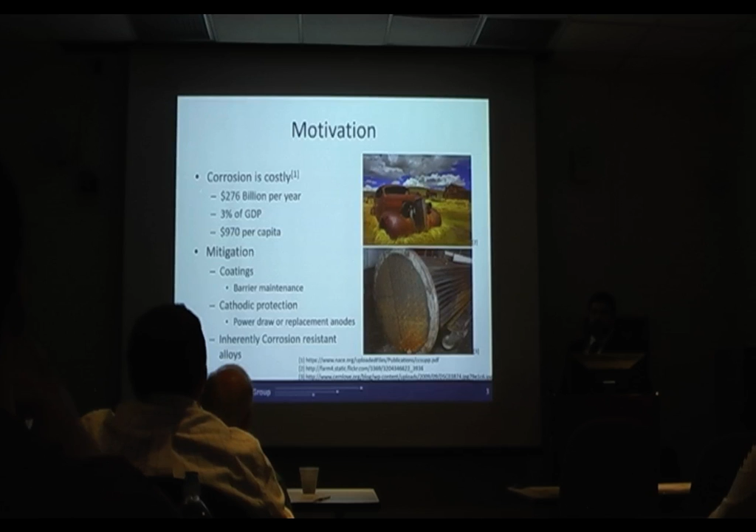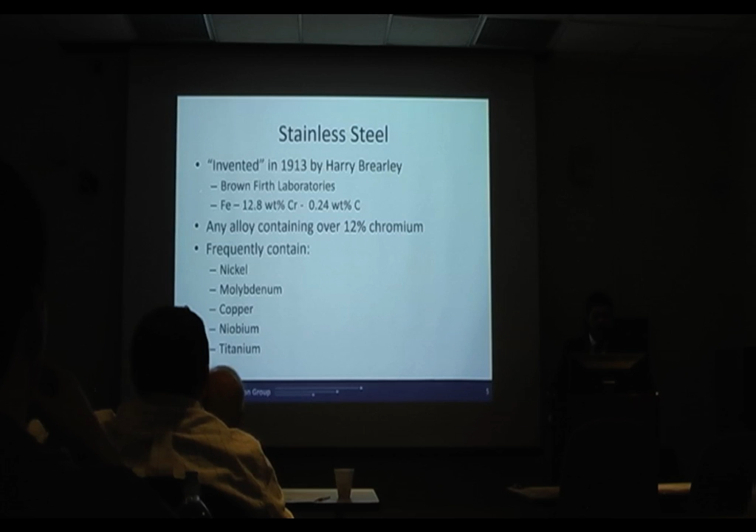Slide 5, Chad. So the question is, how can these alloys be modified to actually prevent corrosion? This was first done in about 1913 by Harry Brearley at Brown Firth Labs. He noticed that his samples, to which he had added chrome when making knife steel, had significantly resisted etching. The composition this happened with was 12.8% chromium and 0.24 weight percent carbon. But what they found afterwards is that any alloy containing over about 12% chromium resists corrosion quite well, and also frequently added are nickel, molybdenum, copper, niobium, and titanium.

So what actually happens is the chromium is added to form a passive layer. When it encounters oxygen in an environment, it forms a very thin layer of chromium oxide. This is impermeable to oxygen, unlike the iron oxides that form, so it prevents further attack by oxygen. Nickel is added to stabilize the FCC structure instead of the normal BCC structure at room temperature, and this increases the ductility, toughness, and workability.

The sample composition, or the composition range for 316, is shown below, and the big thing to note here is it's 16 to 18% chromium, 2 to 3% molybdenum, which is different than 304 - that doesn't have any molybdenum in it - and nickel is 10 to 14%. Note that the 14% is the upper limit of this range, which will be important later.

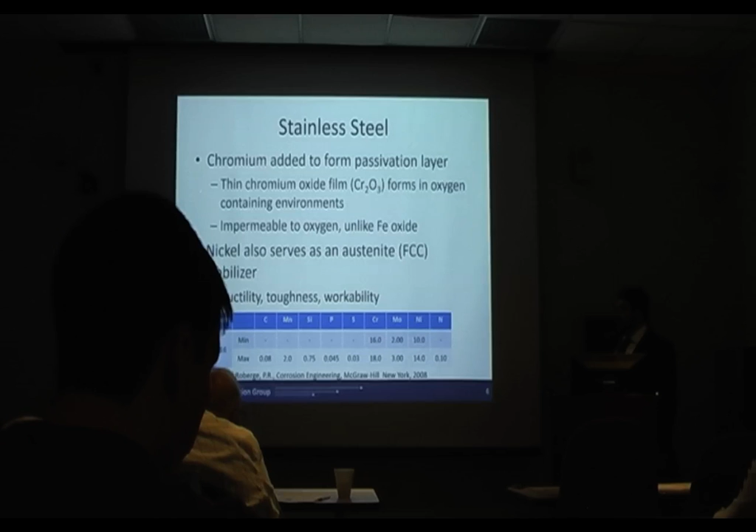So the problem with this stainless steel is that when it's heated into the 400 to 750 Celsius range, you get precipitation of M23C6 carbides. First you get interstitial segregation, primarily carbon, to the grain boundaries. The chromium follows it, and you end up with these carbides precipitating there, which is shown in an energy-filtered TEM image on the right. In this particular image, since it's energy filtered, the brighter it is, the more chromium it has. So, Chad, this is slide 7.

So here in the center, you have the M23C6 carbides, where M is either iron or chromium, but primarily chromium, as you can see here. And then you have this kind of neutral gray for your matrix, and you can see it's darker immediately around those carbides, which is because the chromium there is depleted. It's been sucked into the carbide.

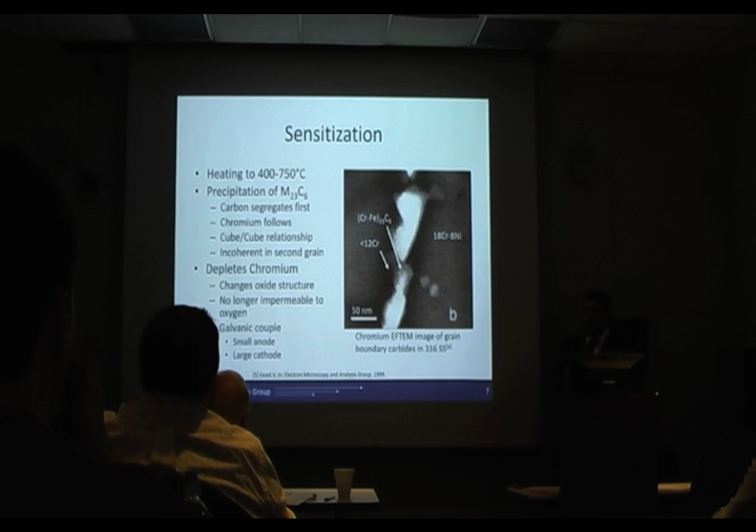The problem with this is that it can drop chromium below 12%, so you change the oxide structure back to the normal iron oxide structure, and it's no longer impermeable to oxygen. But the real problem is that you now have a galvanic couple between your very large grain area with the passive layer, which is a large cathode, and a very small anode area around the grain boundaries, which is vulnerable, so you get very aggressive attack there.

Slide 8. You can get a couple different kinds of attack. The most commonly studied is intergranular corrosion, shown on the right here. This is chemical attack of the grain boundaries, and it's usually assessed with the ferric sulfate sulfuric acid test. This is a very set chemistry of the set amount of ferric sulfate, sulfuric acid, and water, and it's boiled inside a flask with a condenser. The point of this is that it's very reproducible across different laboratories.

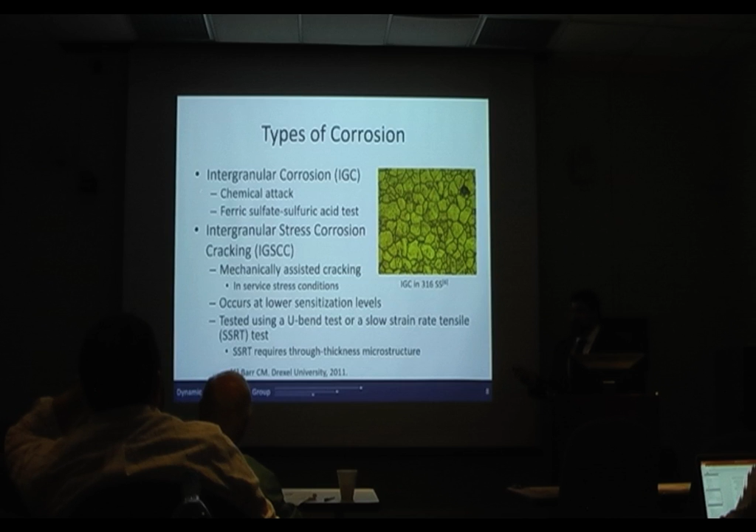However, you also have a second kind of attack called intergranular stress corrosion cracking. This, in addition to the chemical component, has a mechanical component as well, and it's experienced more in service conditions. The big thing with this is you can actually get it at lower sensitization levels than you can get intergranular corrosion. This is typically studied with a U-bend test or a slow strain rate tensile test. The catch with this, especially with the slow strain rate tensile, is you need a through-thickness microstructure to study it because it's machined from the bulk alloy.

Slide 9. So the question is, we see the grain boundaries are being attacked, and we want to know what's different about the different types of grain boundaries. First we have to know how to describe them. There are 5 macroscopic parameters and 3 microscopic parameters.

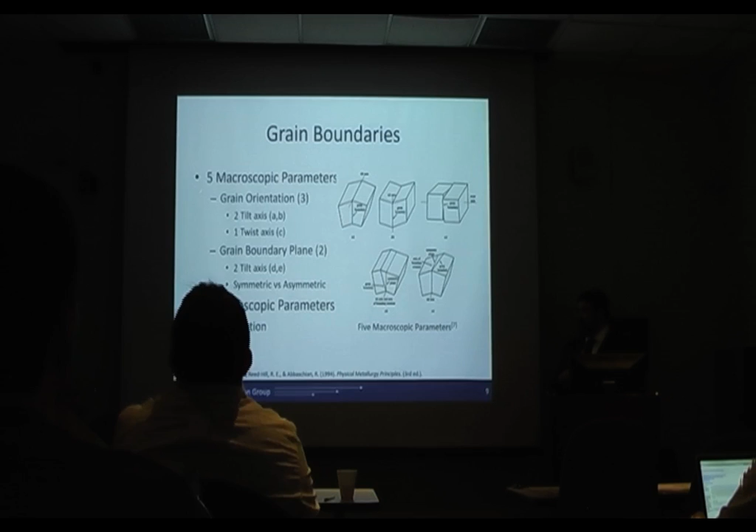The macroscopic parameters are again divided up. You have your grain orientation, so each grain is its own crystal, and those crystals can be tilted in 2 axes relative to each other, and they can also have a twist. Then the grain boundary plane, where those 2 crystals actually meet up, can also be tilted in 2 different axes. The microscopic parameters are small translations in 3 dimensions that are a fraction of the unit cell.

So now that we know how to describe them, the grain boundaries can be classified. First is the low angle grain boundary. This is less than approximately a 15 degree grain boundary, or angle between the 2 grains. This is typically described as a network of dislocations, shown in the top image on the right. We have on the left 1 grain, on the right another one, and right in between you can see these dislocations that are required to make the 2 crystals match. The spacing of the dislocations is described by this relationship here, which includes the spacing, the Burgers vector of the dislocations, and the actual angle of the 2 crystals.

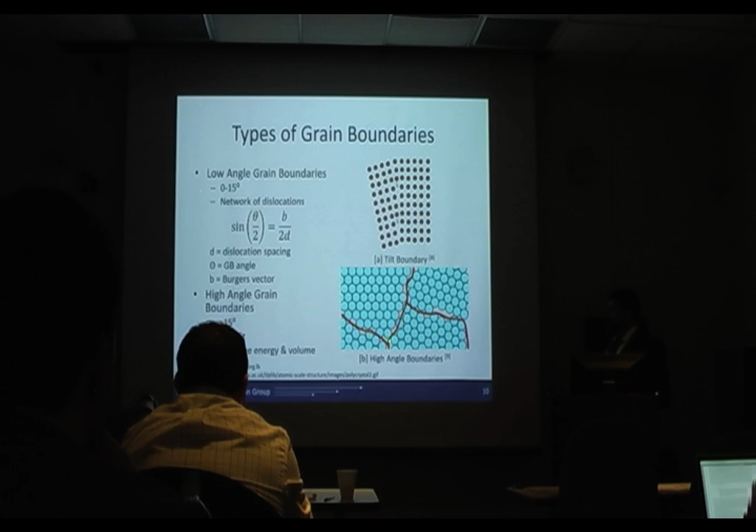If you have a larger than 15 degree misorientation, you have what's termed a high angle grain boundary, and there you typically have a much poorer fit, shown in the bottom image. It doesn't line up as nicely as it does in the top. This causes much more free volume and free energy, which can be seen as the white space.

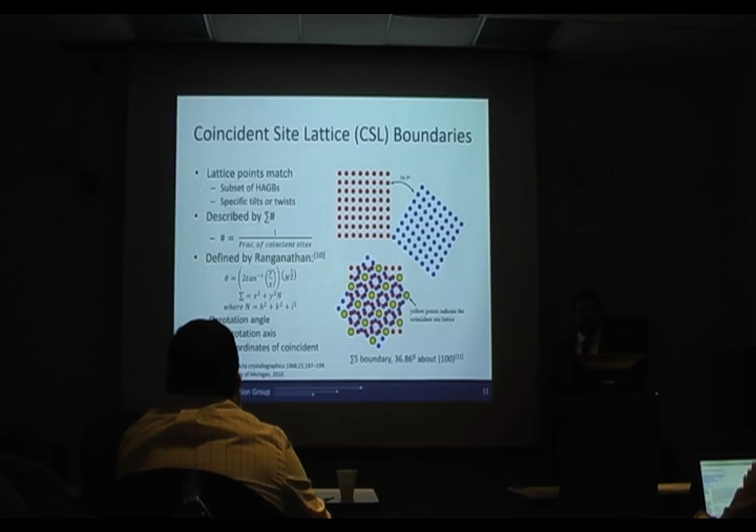This was described by Ranganathan. He came up with equations to calculate the fraction of coincident sites, which is typically denoted by its sigma number, the inverse of the fraction of coincident sites. So if 1/3 of the sites are shared, then it would be a sigma 3 grain boundary.

Moving on to grain boundary engineering, Watanabe proposed in 1984 that these grain boundaries could be used to improve the properties of polycrystals by processing them so that you have more of them - typically more of the low CSL, sigma less than or equal to 29. The idea was this way you can adjust the properties, including the strength, ductility, and corrosion resistance. And the way you get more of these CSLs is through thermomechanical processing.

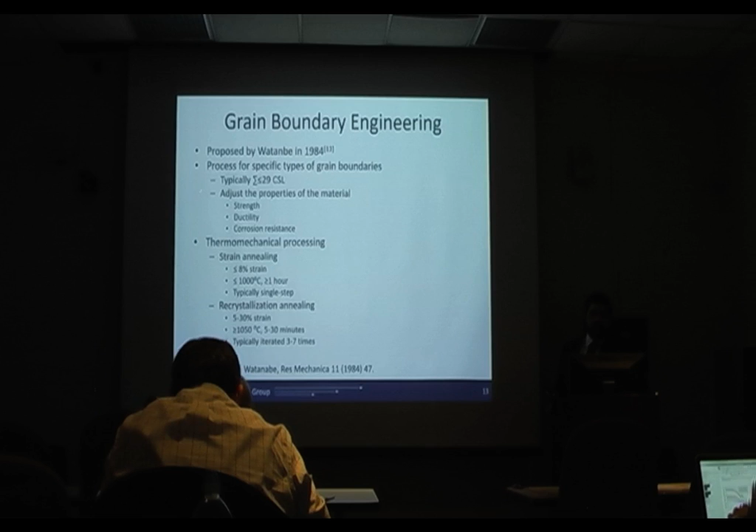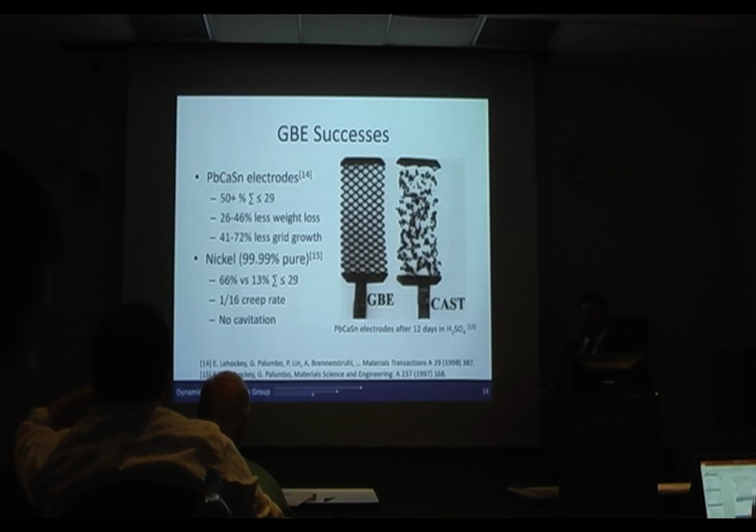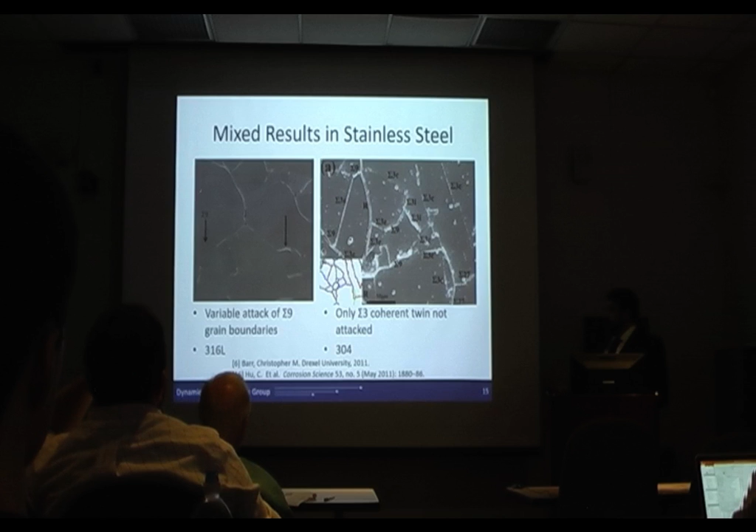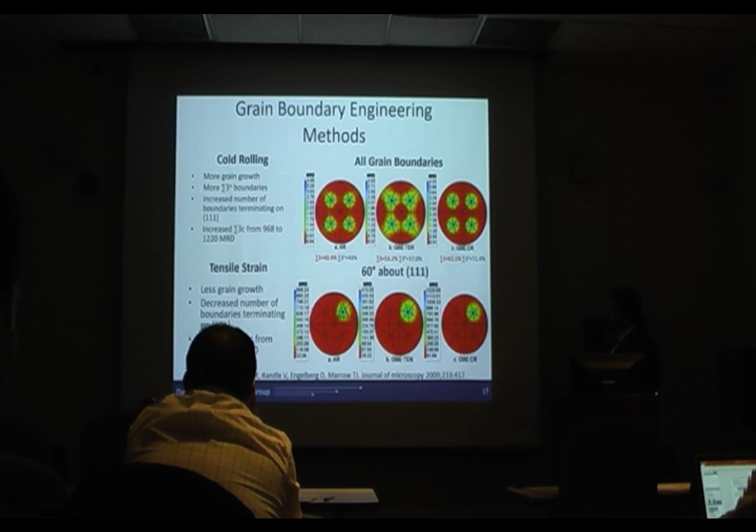That brings us to some of our questions. How does the grain boundary plane play a role in the corrosion resistance in stainless steel? It looks like it does, but we're not quite sure how. And how do corrosion-resistant grain boundaries affect the bulk corrosion resistance of the material?

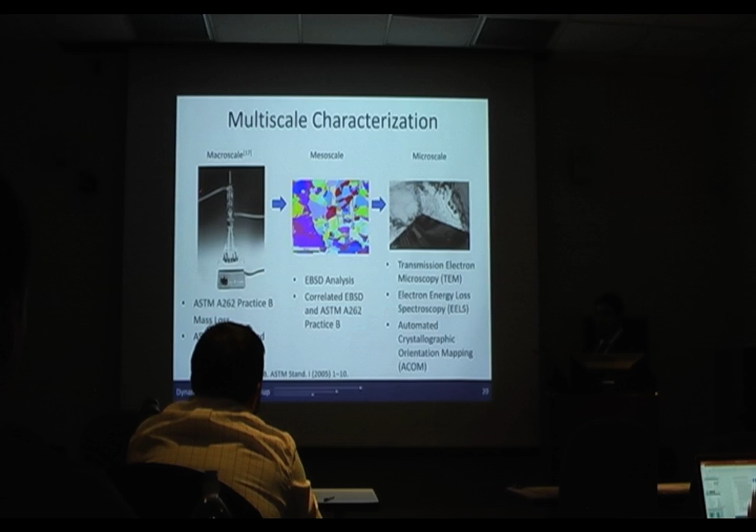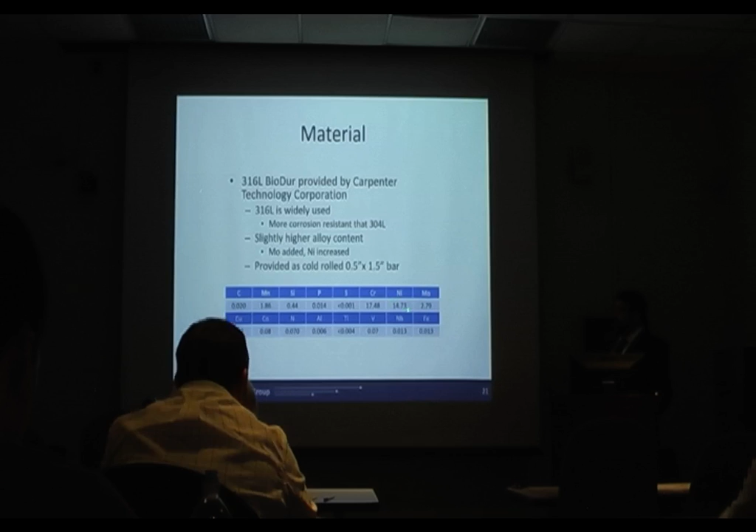The material that we used was primarily 316L BioDur provided by Carpenter Technology Corporation. 316L is widely used, and it's more corrosion resistant than 304. It has a slightly higher alloy content. Compared to the 304, moly's been added, but in this heat specifically, the nickel's actually even a bit above spec. It's 14.73%, and typically it's not above 14, and in a lot of heats it's down in the 10 to 11 range.

So moving on to my results. First question was calculating the grain boundary plane. There are established methods for doing this in TEM, but initially we wanted to do atom probe tomography and correlate that with the grain boundary plane. However, the problem with that is the specimens don't load well into a standard double tilt holder. We do have a dedicated holder for them for TEM, however, it only has a single rotation axis, which makes typical analysis somewhat more difficult.

However, we do have our ACOM system. So what we can do is tilt the grain boundary so that it's parallel to the beam. That angle is then beta. In this case, it's 0 because it's parallel, but if you know your angle, or if you know your thickness and can measure the width, you can calculate that. Then you also measure this alpha between the grain boundary and the x-axis. You vectorize those in vector A and B, and the cross product of those is your grain boundary normal. If you multiply the orientation of either grain by that normal, you end up with the local crystallographic indices of those grain boundary planes.

We tried this on a coherent sigma 3, and we're within 3 degrees, which is getting close to how closely we could align that grain boundary. I have the reference here for Dr. Randle's paper. She had discussed how to do this in SEM techniques, but we realized we could apply this to TEM, and then Asher Leff helped me write the MATLAB code for this.

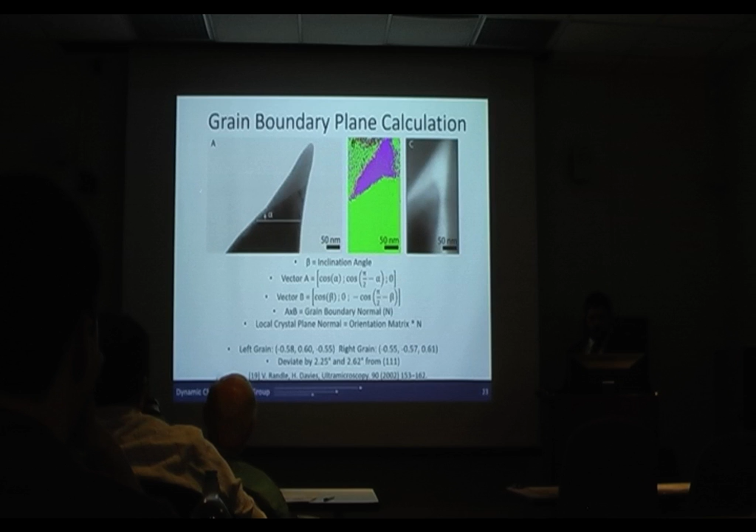So moving on, we wanted to see how we could apply this to other materials as well, especially atom probe specimens. This is a 5456 specimen, and on the left we can see the grain boundary has been decorated by these precipitates. By getting an ACOM scan, we can then calculate the local grain boundary planes for each of the grain boundary segments between those precipitates.

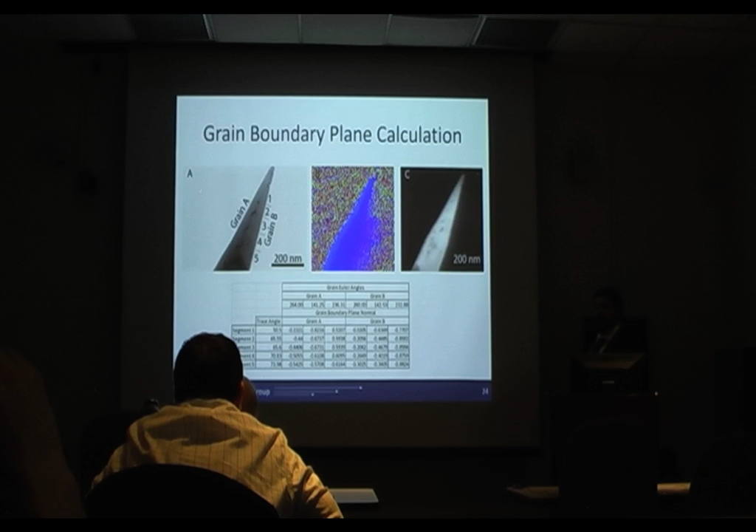So moving on, we're on slide 25 now. Next question was propagating our GBE microstructure through thickness. Most of the work in GBE has looked at the rolled surface because that's the most affected region. However, for the slow strain rate tensile specimens, we wanted to be able to machine samples out, and this also has industrial applications because you can then machine bolts and things like that.

Dr. Barr's procedure, which he spent quite a bit of time refining, settled on a 5% rolling reduction and then a 1 hour hold at 1000 Celsius. However, he did not look at the center line. Michiuchi used a very similar procedure, except that he held for 72 hours, and he reported that doing so allowed propagation through the thickness. Again, we wanted that for the best corrosion performance.

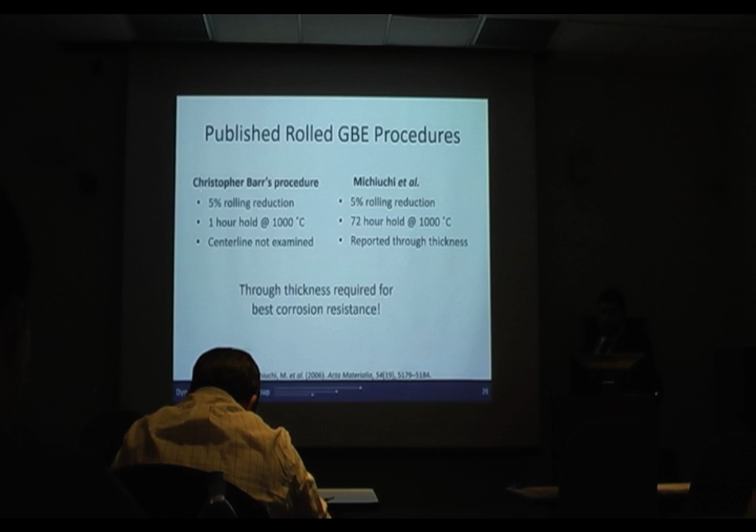However, when we attempted his procedure, we found that it was significantly more variable than we would have liked. The grain boundary maps are shown at the top, but the big thing is our sigma 3 to the n, which when I say that here, it's the sigma 3, sigma 9, and sigma 27s added together. The total fraction in the left map was 72%, which is pretty good, but it was only 50% in the right map, which is much more indicative of the length fraction expected for an annealed microstructure.

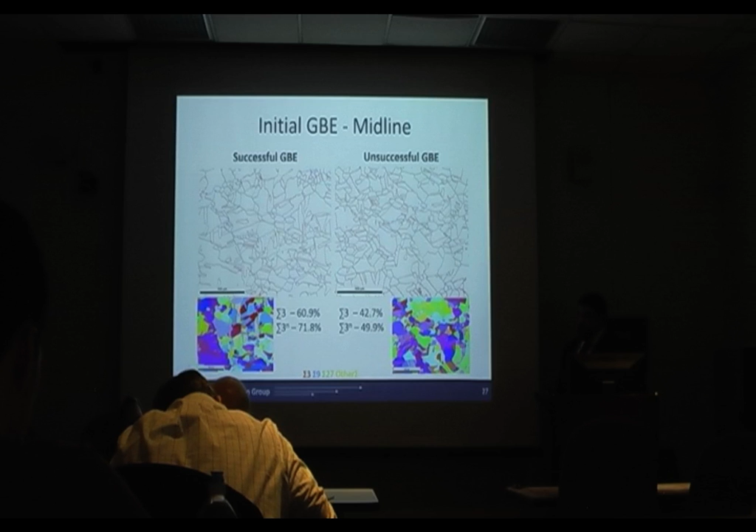So that is referred to here as the SR condition. We went back and tried several iterated procedures. Again, we're still using 5%, but we tried 3 iterations at 1000 and 1020 Celsius.

We tried different times as well. What we found was our sigma 3 to the n content rapidly reached a relatively high level and was highly consistent, using 2 hours at 1020 C, repeated 3 times with 5% strain.

Moving on, the two colours are the two different section surfaces. On the previous slide, the blue and red are surface and center. Actually, the red is 1000 Celsius, and the blue is 1020 Celsius. They're also using slightly different times. They are all measured at the center.

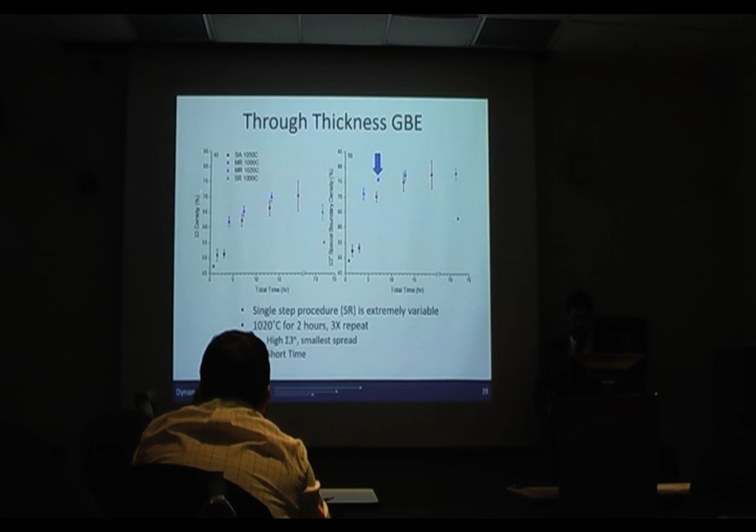We're moving on to our microstructural characterization. We have our annealed microstructure, which is our control - that's what was delivered to us and then briefly annealed to remove the cold rolling. We have a rolled GBE, which I just talked about, and then a tensile GBE procedure published by Dr. Jones and Dr. Randle. The most reported metric for GBE at this point is the length fraction.

However, there are several different ways to classify that. The most traditional is the Brandon criterion, represented here by the B. There's also the Palumbo-Aust criterion, which is a little bit tighter, and that's been shown to track a little bit better with corrosion performance. Then there's also just a flat 2-degree cutoff, which is actually much tighter for sigma 3s and a little bit looser for the higher order sigma grain boundaries.

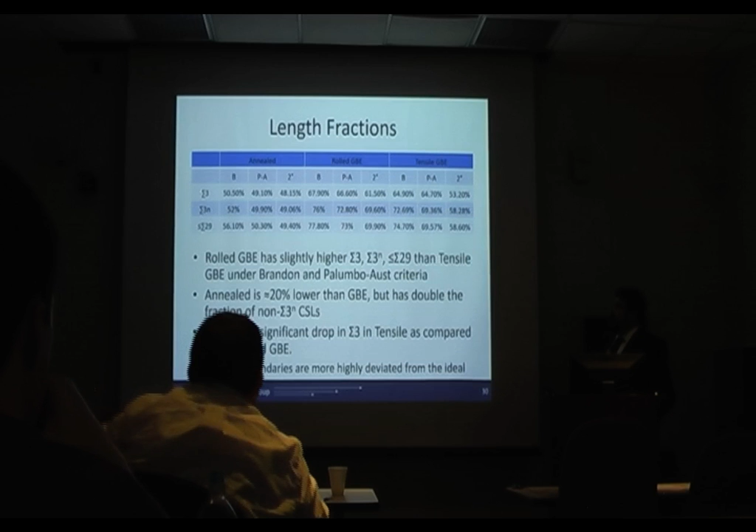What we found was that the rolled GBE has slightly higher content than the tensile GBE, and the annealed is about 20% lower in length fraction compared to the GBE. But the really big difference that surprised me was the length fraction of sigma 3s under the 2-degree criterion: 61% for the rolled GBE, down to 53% for the tensile GBE. What this denotes is that in the tensile GBE, the sigma 3s are actually more highly deviated from the ideal. They're still within the criterion for the Brandon criterion, but a significant percentage of them are beyond 2 degrees.

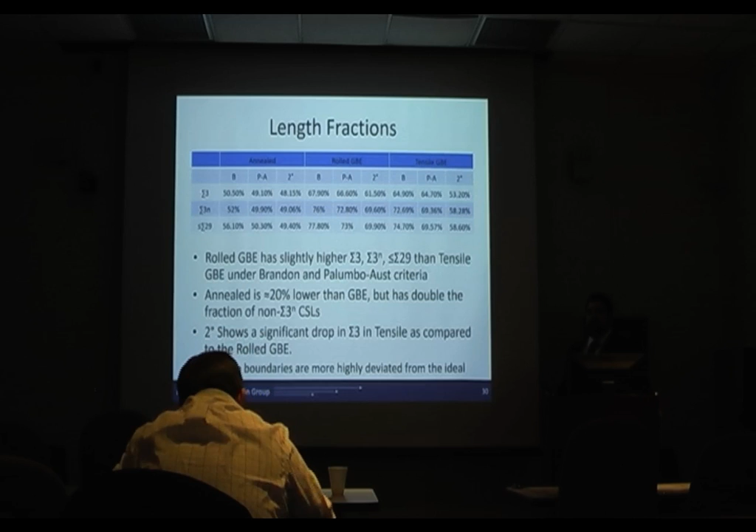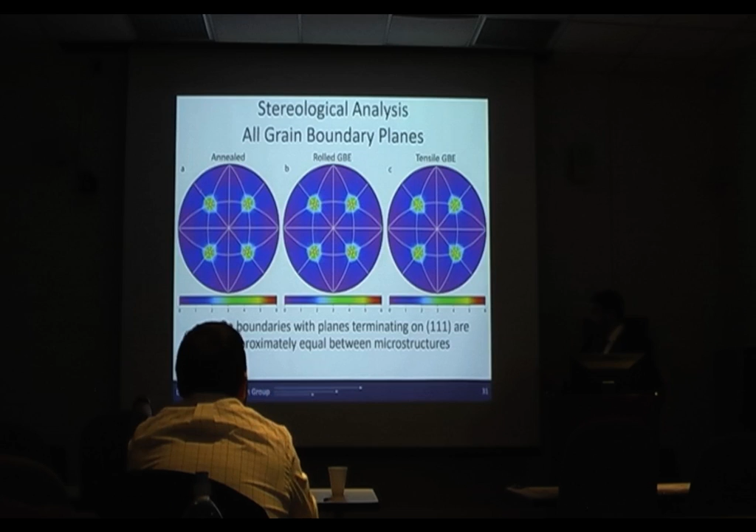Moving on to the stereological analysis, we were somewhat surprised to find that we actually had the same number of grains terminating on 111 in all 3 microstructures. This is not what was shown by Dr. Jones. When we look at the 6 degrees about 111, we actually have a much higher fraction of sigma 3 segments, noted by about 2,800 MRD, compared to his reported value in the range of 1,000.

But again, they're the same across all three microstructures, which is not what he showed. There was a follow-on work by Randle where they noted something similar in only the tensile, where when they iterated it, they saw that it again returned closer to what the annealed was, but it still wasn't quite identical, and they didn't look at the rolled condition.

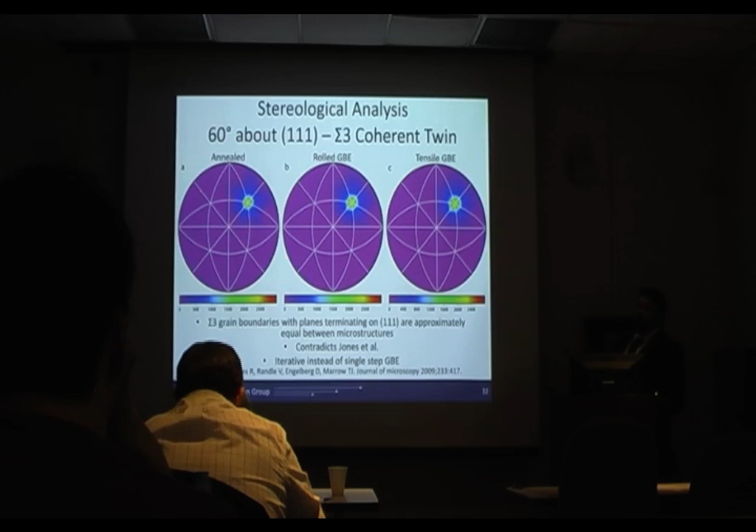When we move to the triple junction analysis, when three grain boundaries meet, you have a triple junction, and we're looking at the number of CSL grain boundaries that meet there. So a 3 CSL triple junction has 3 CSLs all meeting, and generally those are considered to be immune to cracking.

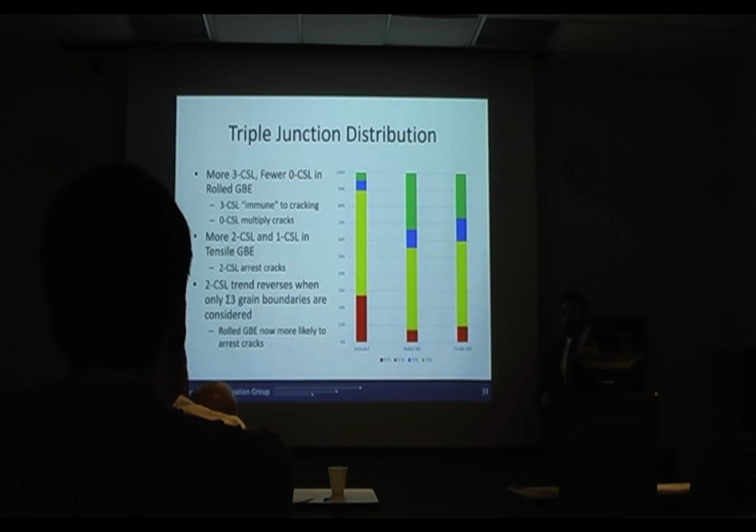What we found was that the rolled GBE had more of these 3 CSLs and also had fewer 0 CSLs, which is important because with 0 CSLs, if you have a high angle grain boundary with a crack propagating along it that hits a triple point with 2 other high angle grain boundaries, it actually multiplies, so you end up with 2 other cracks propagating, or it can do so.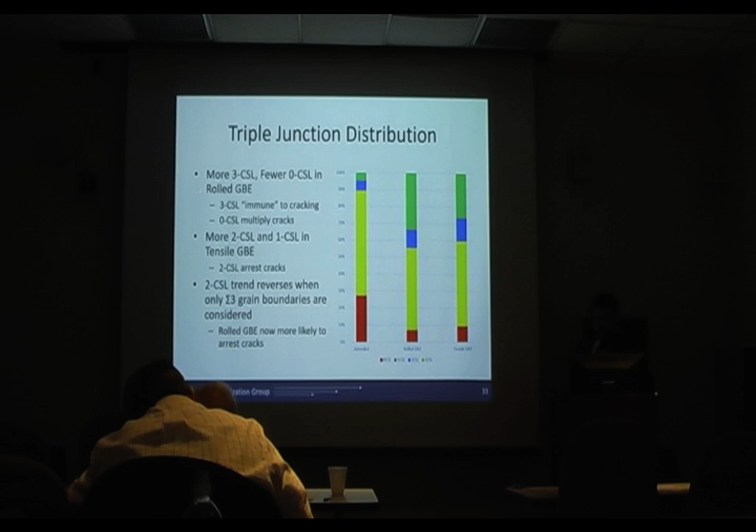The 2 CSL, on the other hand, was higher in the tensile GB. This is important because the 2 CSL can actually theoretically arrest cracks - so if you have one traveling along and it runs into a triple junction with 2 CSLs, it can stop. However, this trend does reverse if we only consider the sigma 3s to be special, and then the rolled is more likely to arrest cracks as well.

Next metric is grain size, which is a deceptively complex question. On the left, we're considering all grain boundaries, and on the right, we're excluding sigma 3 to the n. The idea there is to get at what's called a twin-related domain, where you can get inside it from any point to any other point, only

going across sigma 3 grain boundaries. What we found was that the GBEs under the all grain boundary condition are about double the diameter and 5 times the area, and under the excluding sigma 3 to the n, it's about triple the diameter and 15 times the area. In both of those, it's about 1.5 larger on the ASTM grain size scale. The rolled GB is slightly larger compared to the tensile GB in both, and the aspect ratio for the annealed is closer to 1, showing that they're closer to equiax.

Moving on to the Vickers microhardness, slide 35, Chad.

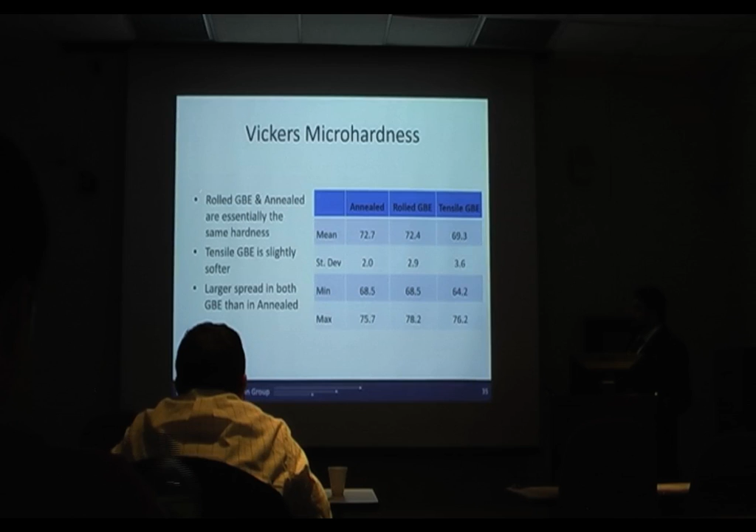The rolled GBE and the annealed are almost identical in terms of hardness, and the tensile GB is a little bit softer. This is actually pretty surprising to me given their differences in grain sizes. However, there's also a larger spread in the GBE than the annealed.

So, quick summary about this. All microstructures have similar coherence to the sigma 3 grain boundaries. Both GBE microstructures have about 20% higher length fraction of CSLs, and the rolled GBE is a little bit higher than tensile GBE, and the tensile GBE is also more highly deviated. The rolled GBE has a higher fraction of 3-CSLs and lower of 0-CSLs. Tensile GBE has more of the 2-CSLs, but less if you're only considering the sigma 3s. And then the rolled GB has a slightly larger grain size than the tensile GB.

All of that indicates that the rolled GBE should be a little bit better in corrosion than the tensile GBE, based off the published literature.

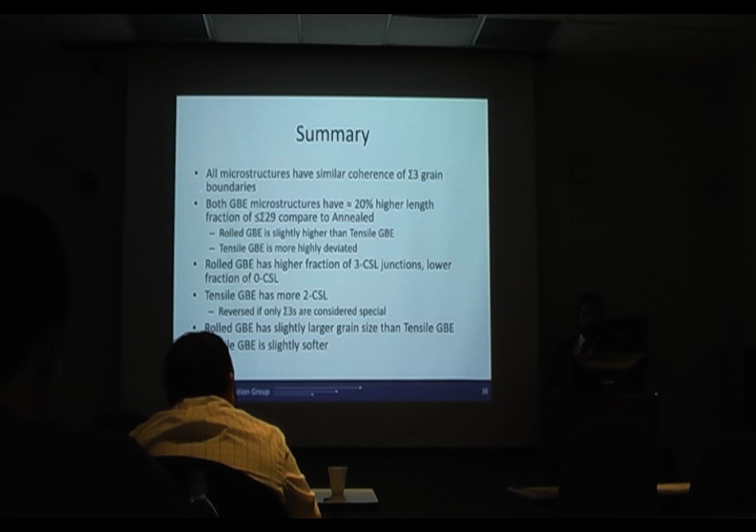What we found was we actually accidentally milled away our platinum coat at the top, but we still saw over 240 nanometers of corrosive attack, and neither grain is terribly close to a 111 crystal plane, being at least 11 degrees away. The enrichment of chromium is about 2% and about 0.5% in manganese, and then we depleted about 2% in nickel and 1% in iron at the grain boundary.

It's a little bit hard to see in these maps, especially on the projector. But those numbers were generated by integrating a large area across the grain boundaries.

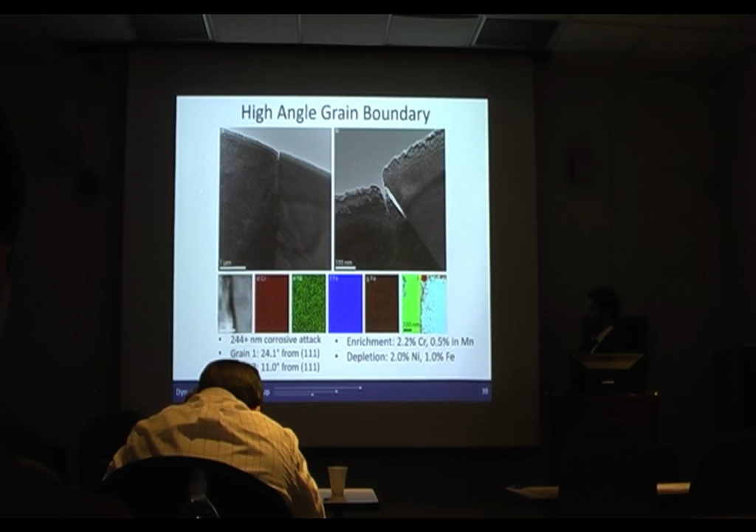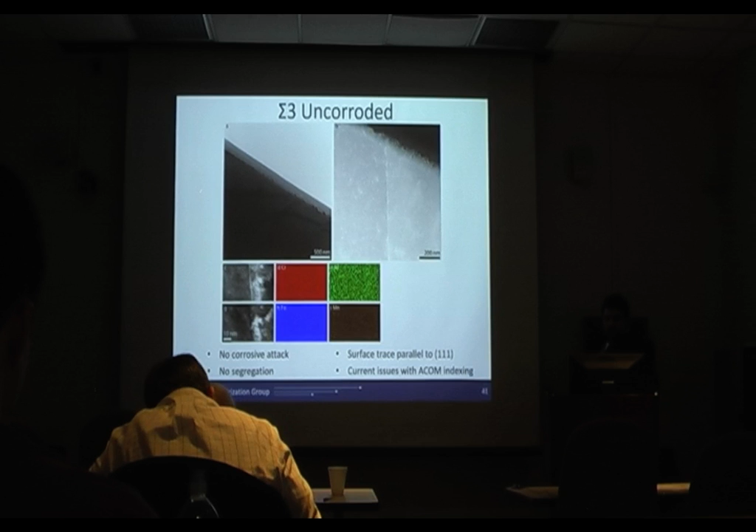So moving on, next we have the sigma 3s that I showed previously. We actually selected 3 different locations to do lift outs. The first one here is a region that didn't appear to be corroded in SEM, and in TEM we can see again that it did not corrode, and we had no segregation at this grain boundary either. The surface trace is parallel to 111. We're currently having some issues with the ACOM indexing of the scan, but based off Dr. Randle's methods, it's about 90% chance that it's a coherent sigma 3.

When we look at one of the straight sections that did corrode, we see that we have 345 nanometers of corrosive attack, and both of the local grain boundary planes are quite far away from 111. Had, again, enrichment of chromium and depletion of iron.

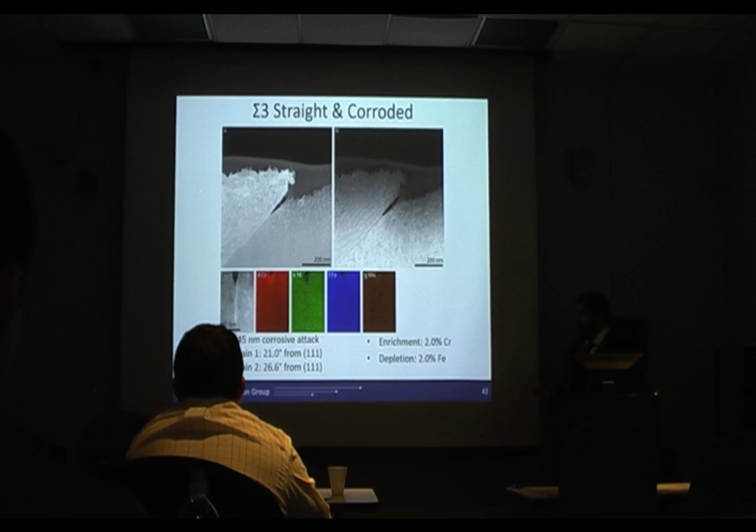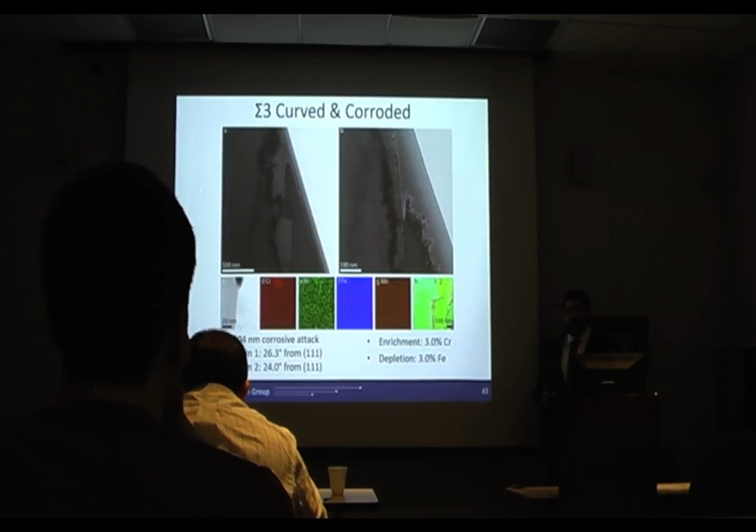And then in the curved portion, again, over 20 degrees away from a 111, and 200 nanometers of corrosive attack, which you can see here. But we also see that it's not actually curved on the nanoscale. We actually have straight segments and facets. So even though it appears curved in the SEM image, it's likely the structure of these very small facets.

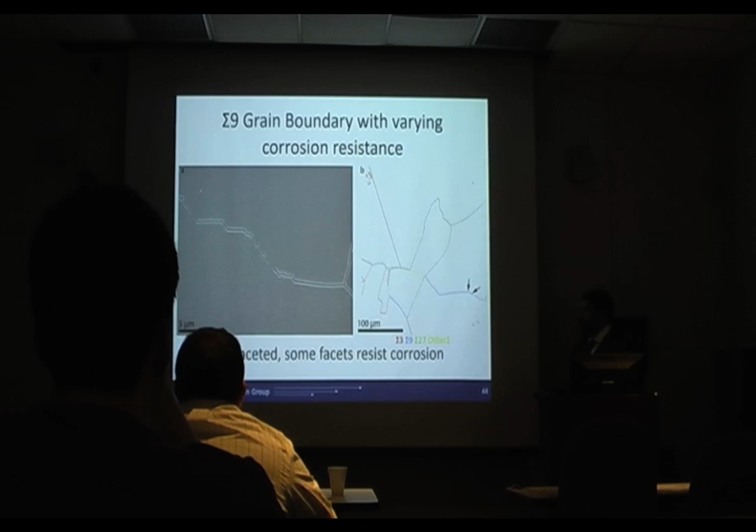Moving on, we have a pair of sigma 9 grain boundaries. On the right, it's denoted in the blue, and then on the left, we have the zoom in of the corroded region. You can see that we have these facets here that are not corroded, then all the other ones did. So for one of the corroded ones, we see we have over 400 nanometers of attack, and then both of the grains are again over 15 degrees away from a 111, and we had chromium enrichment and iron depletion.

However, the sigma 9 that did not corrode was the most interesting of these. You can see we have this kind of faceted structure here, a little difficult to see, but there's also a grain boundary trace, most likely visible between this point here and the actual surface.

What was actually happening was the sigma 9 occurs when two sigma 3s meet, so between the left grain and the right grain is a sigma 9 orientation relationship, but that boundary appears to have dissociated into this nano twin array.

We have a coherent sigma 3 that we determined terminates within around 5 degrees away from a 111, and then we have an incoherent sigma 3 where we have enrichment of about 4% chromium and depletion of 4% nickel.

This is a sigma 3 misorientation, but we don't have the grain boundary plane for that segment.

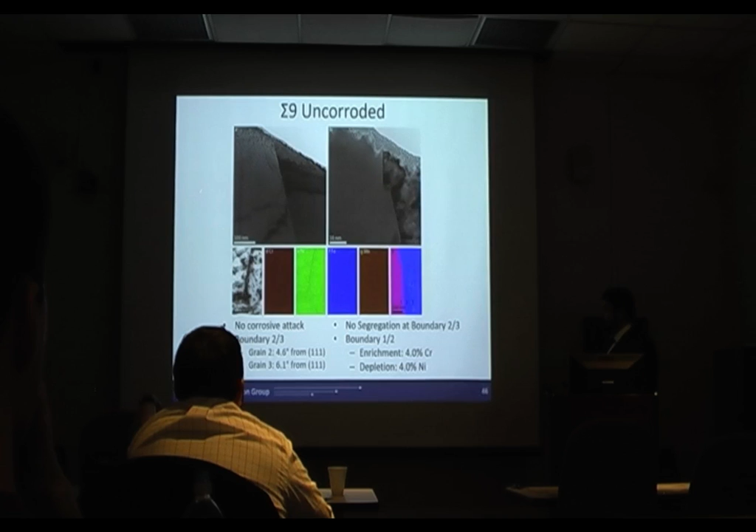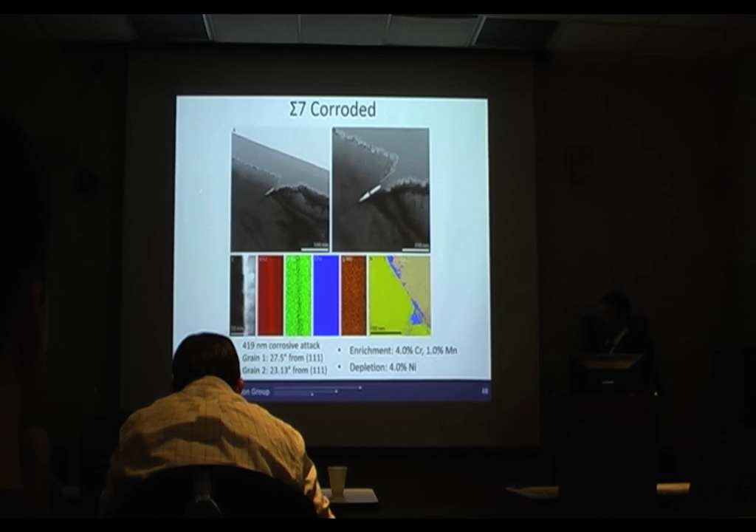When we lifted out the one that corroded, again over 400 nanometers of corrosive attack, which you can see here, both grains are over 20 degrees away from a 111, and we have enrichment of 4% chromium and 1% manganese, and depletion of nickel this time instead of iron.

When we move on to the uncorroded one, you can see it's not attacked at all at that surface relative to the general surface attack.

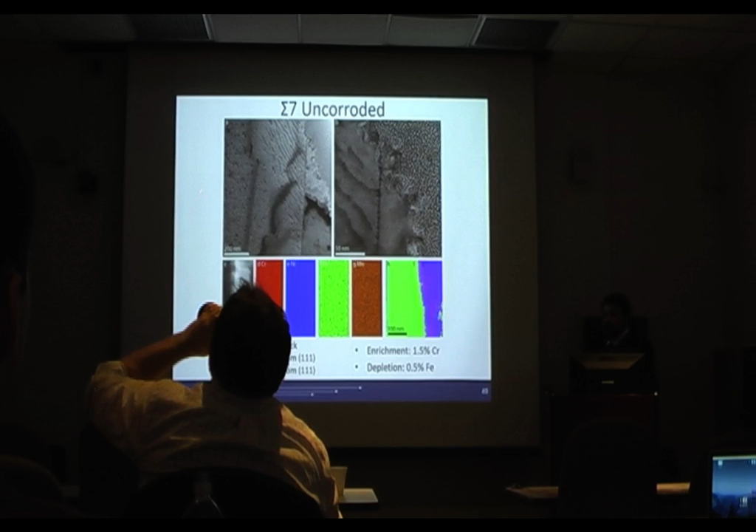We can see that while it's closer to a 111, it's not actually terminating on it—about 10 to 15 degrees away. We actually have slightly lower levels of chromium enrichment and iron depletion, though that variation can also be caused by sample thickness and scattering in this technique.

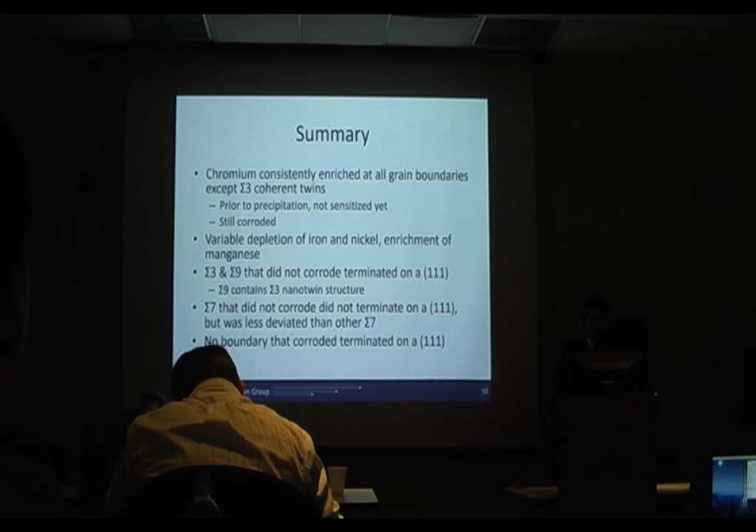So in summary for this section, chromium consistently enriched at all grain boundaries except the sigma 3 coherent twins, prior to precipitation. This indicates precipitation hasn't happened yet. We actually have an increase in the chromium level, so it's not classically sensitized yet because we don't have the depleted region, but it would be the early stages of sensitization.

However, it's still corroded, which... Can you remind me what was the heat treatment? For this, it was a 1 hour sensitized at 675 Celsius. And how was it treated? Did you quench it? It was after the grain boundary engineering, it was quenched, and then we heated it back up to 675 for an hour. So some of these samples, despite being quenched, show segregation. Yes.

We also saw some variable depletion in iron and nickel, and enrichment in manganese, but that did not appear as consistent. The sigma 3 and the sigma 9 that did not corrode both terminated on 111 grains, and the sigma 9 was actually that array of nanotwins.

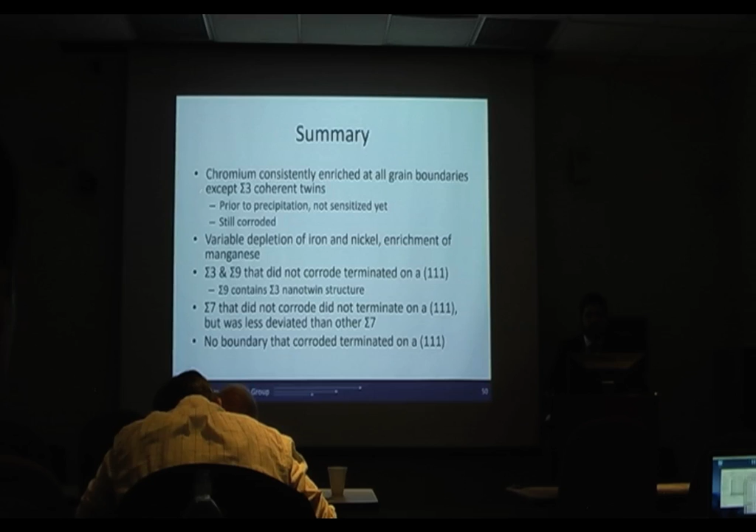The sigma 7 that did not corrode did not terminate on a 111, however it was significantly less deviated than the other sigma 7 from a 111 plane, and no boundary that corroded terminated on a 111.

So moving on, Chad, slide 51, to the bulk corrosion portion.

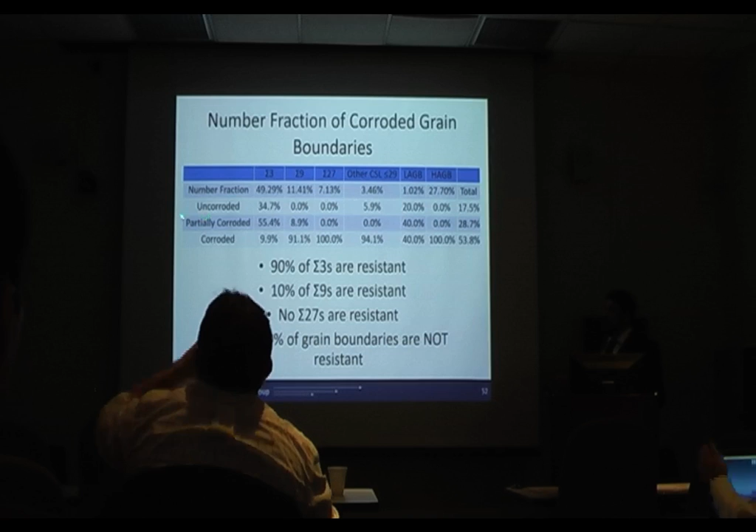The first thing we did was those images that I showed with the correlated TEM, SEM, and corrosion. I went through and counted the number of grain boundaries that were either completely uncorroded or partially corroded, meaning they had facets that were resistant, like we've been looking at in TEM, or were completely corroded.

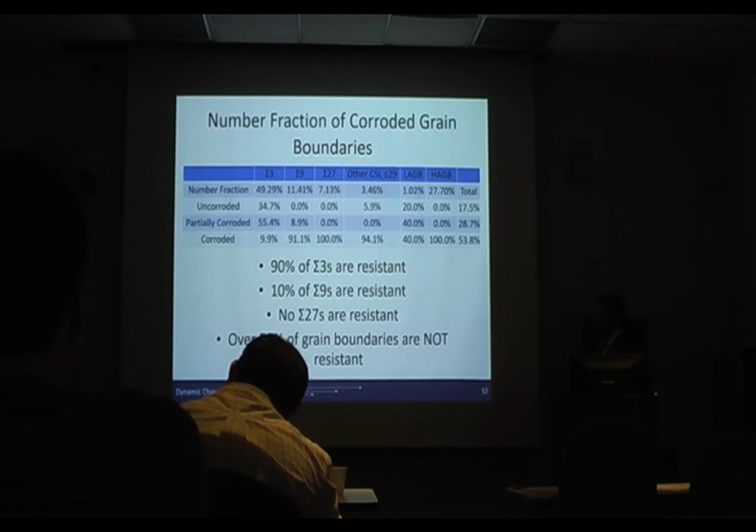What we found was that 90% of the sigma 3s were at least somewhat resistant, but less than 10% of the sigma 9s were, and no sigma 27 in this case resisted corrosion. Also, when we look at the total number fractions, over 50% of the grain boundaries do not at all resist corrosion.

When we move on, because of some distortions from the actual collection in our microscope, I wasn't able to stitch the scans together, so they're just shown side by side.

What I did then was go and color in regions. On the left are what I'm calling cracked or arrested regions—within any individual color, you can get from one point to any other point without going over a cracked grain boundary. So those regions do have cracks going into them, but they've all arrested at some point.

On the right are twin related domains. In this region, you can get from any point to any other point going across a sigma 3, 9, or 27. As you can see, they're similar, but not quite the same.

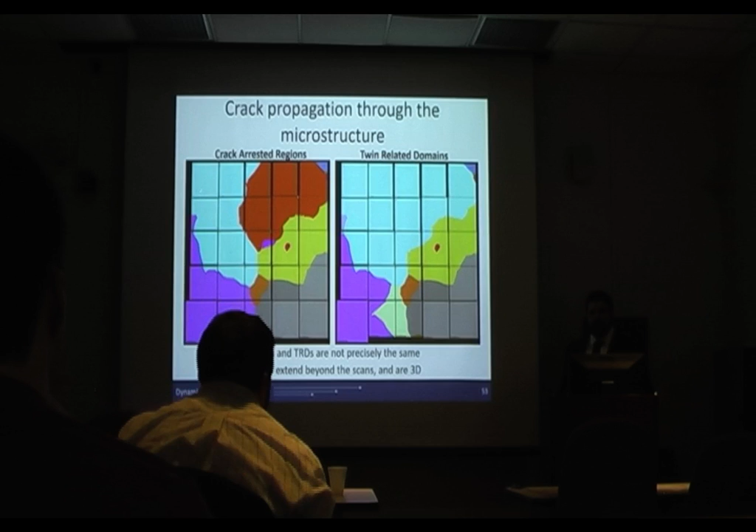On the left, the blue and orange are the same blue on the right, and on the right, the greenish and purple are all purple on the left. The catch is that both of these extend beyond our field of view, and they're also three-dimensional structures. So it's possible that the CARs and TRDs are actually the same, but my experiments were unfortunately too limited to determine that.

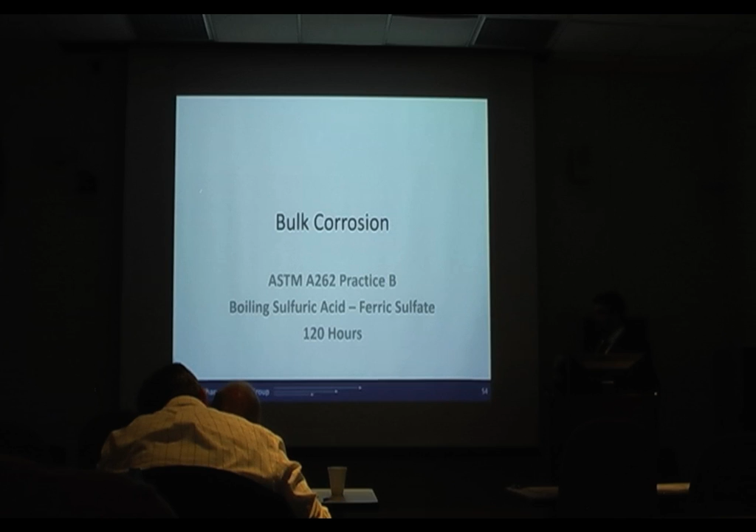Moving on to the bulk corrosion, we have the 262 practice B. The standard method involves immersion for 120 hours, massing it before and after to see how much mass it lost. When we look at our unsensitized samples—these were all quenched but not heated into the sensitization range again—we can see that we are getting attack at the grain boundaries, indicating just how aggressive this environment is.

We have our annealed, rolled, and tensile GBE again, but we've also added two conditions: the annealed and rolled plus 10% elongation. We made tensile samples from these microstructures and pulled them. The idea is, as we're sensitizing these, we want to see the role that adding strain to the microstructures plays.

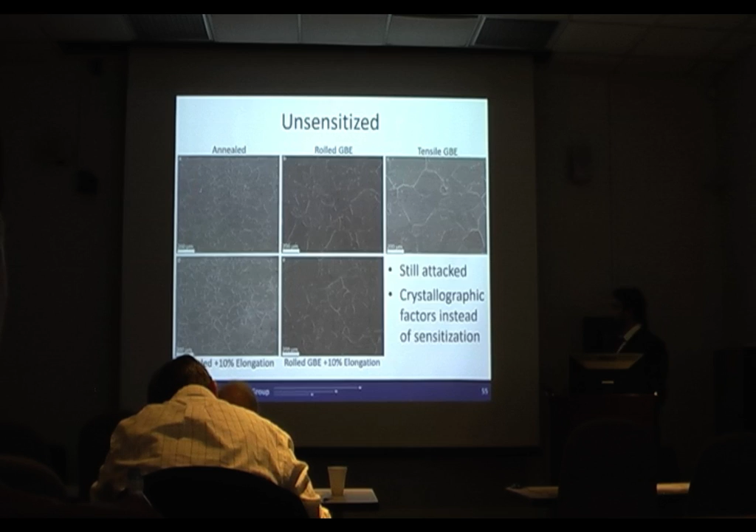I also did the 1 hour sensitized, which you'll see the data from, but honestly in SEM they appear pretty much identical to the unsensitized.

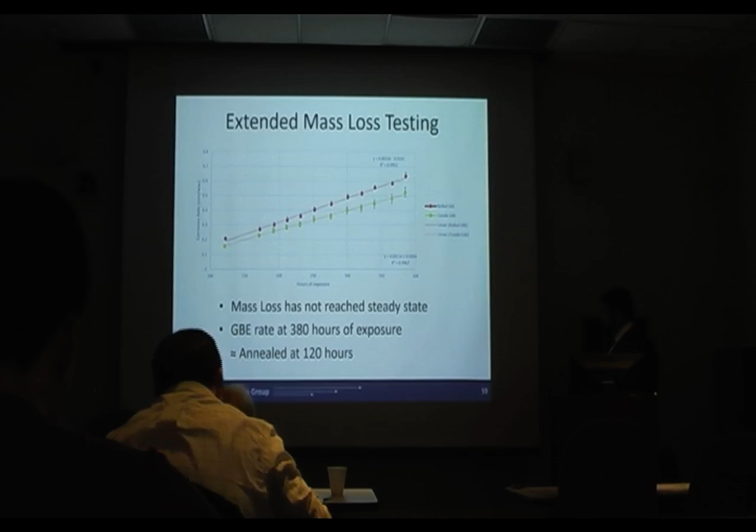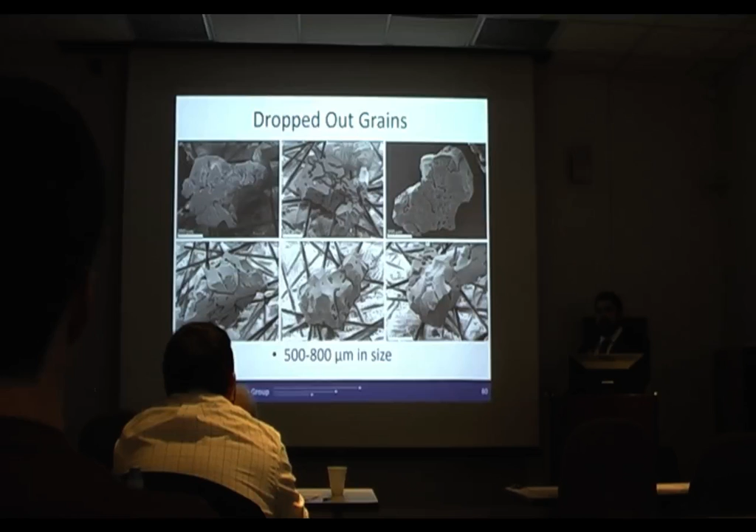This is actually somewhat confirmed because I went fishing in our test rig for the grains that dropped out, and these are all from our grain boundary engineered samples. If I back this up to the 100 hour, in the annealed, these are about 50 to 100 micron grains that dropped out. Then on slide 60, we see that these are actually 500 to 800 microns now dropping out of the GBE microstructure. You can see this is actually a flat face. Almost all the grains have a very obviously flat face. This is the polished surface of the sample, so it's still our surface layer that's dropping out.

So the question then is, how does this fit into the published work? I'm not the first person by any means to talk about the TRD model. That was Reed and Kumar in 2006, who actually investigated the corrosion with respect to TRDs in 2011. He was the one that noted that only the sigma 3s were very, very good at arresting the cracks. All the others were at best variable.

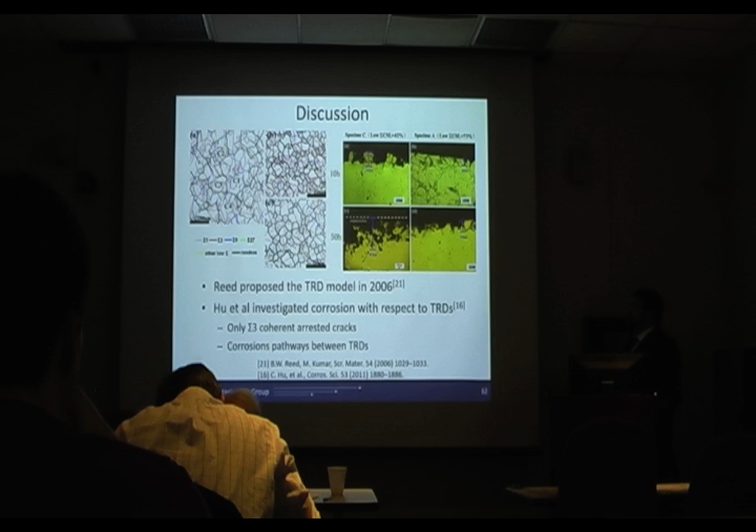When he plotted the mass loss, he was actually looking at three different conditions with different levels of CSLs. The two lower conditions show this rapid increase in the mass loss rate around 12 hours. However, specimen A with 73% CSLs sees a much, much lower increase in the mass loss rate, and he attributed this to the TRDs. To clarify, total mass loss, not rate -- yes, he was reporting total mass loss.

This was actually a slightly different environment as well; it wasn't the standard ASTM A262. But what he was hypothesizing was that the surface layer of the TRDs is protecting the lower TRDs. Since they're relatively large, he hypothesized it would take a lot longer for the cracks to get around behind them and expose the grain boundaries underneath. However, this is directly contradicted by what I've observed in the extended mass loss testing, because I'm noting a rapid increase in the mass loss as soon as you start dropping TRDs.

So finally, we have our bulk corrosion with the U-bend specimens. This is for testing intergranular stress corrosion cracking. We actually ended up using three different procedures on the same set of specimens. First is ASTM G123, a standard solution of sodium chloride spiked with phosphoric acid that boils at about 110 Celsius. The test is specified to go up to 1,000 hours, and in their interlaboratory testing, every single specimen of 304 and 316 that they tested failed, mostly within 48 hours and all within 2 weeks. 1,000 hours is right around 4 weeks.

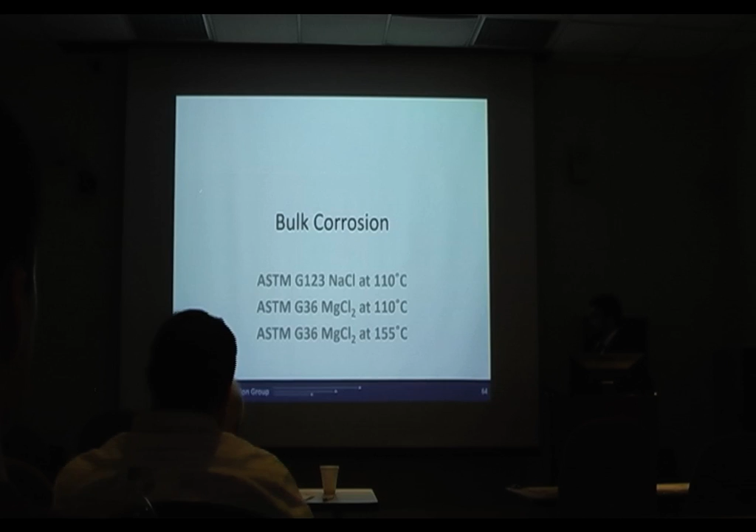What I found after that testing in the top row is not a single one of our specimens showed any cracks at all. So we went back and did the G36 test with magnesium chloride, known to be much more aggressive. We did it at 110 Celsius, which has been shown to promote corrosion cracking, and after 2 weeks we still had no cracking.

Finally, we went for the full G36 at 155 Celsius, and within 24 hours every single specimen cracked, appearing to be mixed mode intergranular and transgranular. Unfortunately, from that we couldn't say much about how microstructure actually affects it because they all cracked at the same time and appear the same, especially with transgranular cracking.

However, an interesting note from that is that relatively modest nickel content in 316L massively increased the stress corrosion cracking resistance, which was not expected. So, our conclusions.

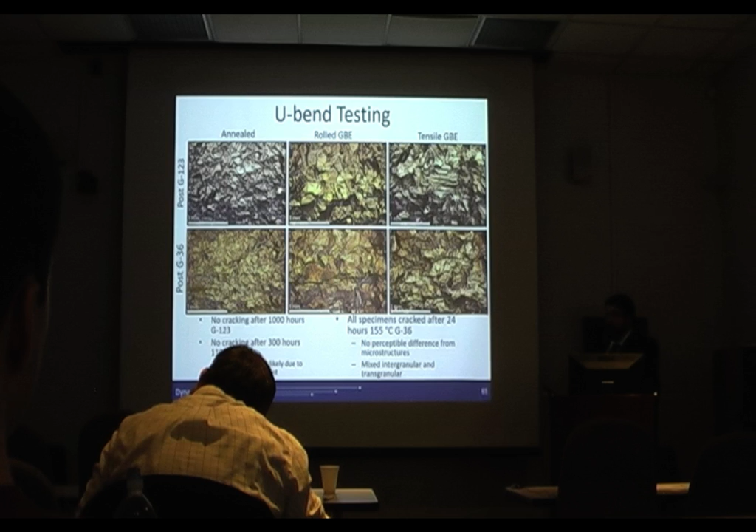And then the question that I didn't know I should have asked was: what role do twin-related domains play? From this work, it looks like the crack arrest region, or TRD size, is most likely the most important factor in the intergranular corrosion of these microstructures.

And a final technical note: it really is a lot easier to study IGSCC in materials that will actually undergo IGSCC.

So for future work, what really needs to happen is better analysis of twin-related domains as well as the crack arrested regions, to study how the TRDs form and their size. This is going to be especially challenging given their size and the fact that they're three-dimensional, so your twin chains can actually be going up or down in addition to around. And we need to be doing long-term corrosion studies.